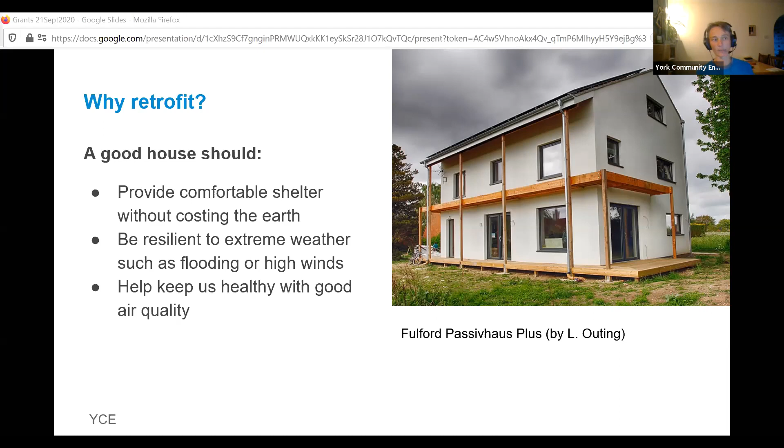Unfortunately, most of us live in houses that have stood for decades, if not centuries, and will be standing in 2050 when the UK is supposed to be carbon neutral. So how we bring them up to the standard needed to both tackle climate change and improve people's well-being is what we will talk about next. So what is retrofitting? It's basically making improvements to an existing structure, in this case a house, and each house leaks heat at different rates from different components.

Now, we could just retrofit by fitting new technologies, such as renewables and energy smart systems, to provide the energy we need. But at YCE, we believe that ideally we should adopt the fabric first approach. So reduce the energy needs, reduce the heat losses and energy losses in the first place. We'll look at the different ways to achieve it shortly, but it's also worth mentioning that the first step of any retrofitting should be making sure that basic repairs and maintenance are done. Fitting lots of insulation to a wall that's getting wet from a leaky gutter could lead to serious problems such as mold. So maintenance comes even first, to make sure that the fabric's good.

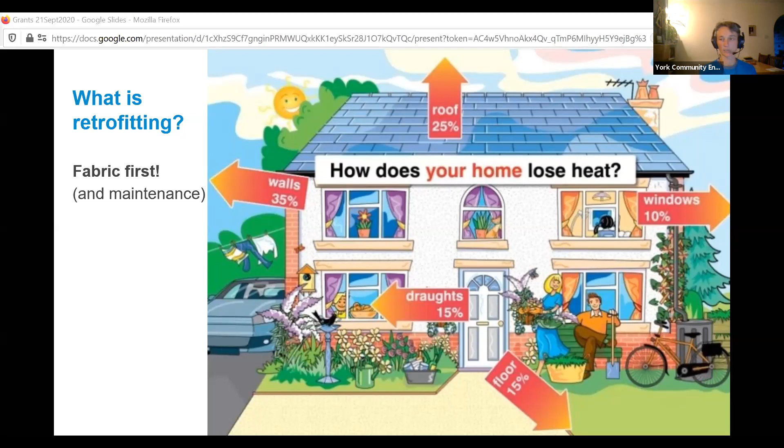So let's look at the first thing that springs to mind when we think about energy efficiency home upgrades. It's probably going to be insulation. If you think of insulation as a winter coat for your home, you choose the one that's suitable for where you are, for the climatic and local conditions. So for example, in relatively dry York, you will be able to consider a wider range of insulation and wall finishes than in rain-swept Scotland.

Without going into too much detail, each house component and insulation material has a U value. Now, this indicates the rate at which heat flows or is wasted through a material. So the lower, the better. And for example, a typical uninsulated suspended timber ground floor has a U value of around 3.3 watts per square meter Kelvin, while a properly insulated one will have a U value of 0.15 or less.

Now, these figures may not sound huge or important, but insulating a floor like that, which we've done during our housewarming party, has improved its U value by around 20 times. And in so doing, has increased the thermal comfort in the room. And I'm sitting on that floor right now.

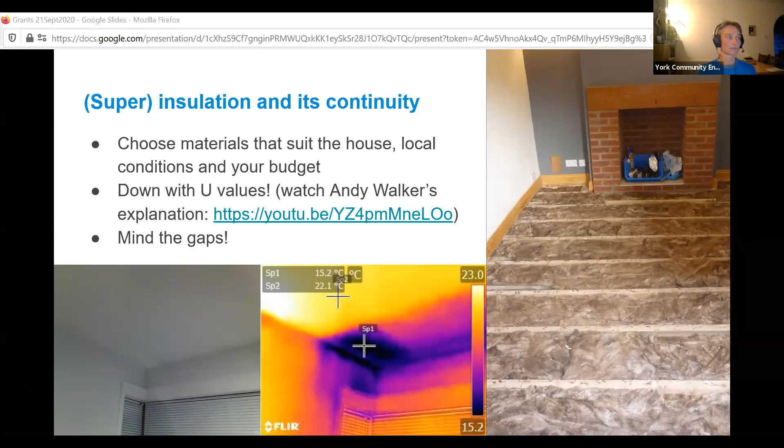Speaking of gaps, airtightness is another hallmark of good retrofitting. It may not sound like a desirable quality for a good home, but it's actually incredibly important. It basically means removing any uncontrollable airflows caused by gaps and cracks in the building fabric. So that's your walls, roof, floors, and other structural parts.

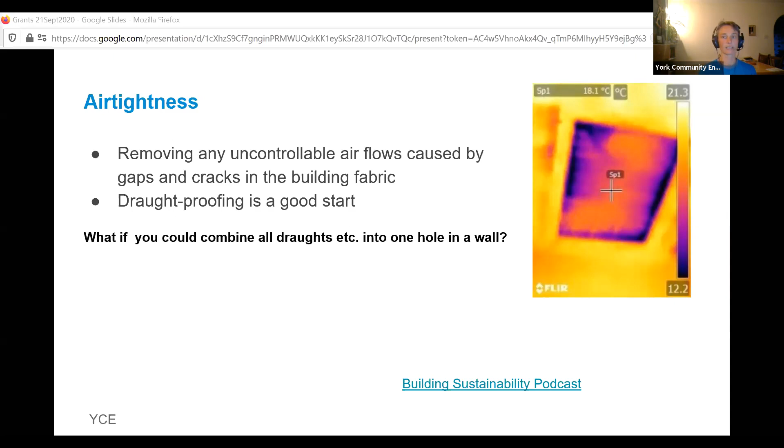Just to help you visualize the scale of the problem, imagine this. Imagine if you could combine all of the drafts and all the gaps and cracks in your house into one hole in a wall. This is something I learned from the Building Sustainability podcast that you will get a link for, and that's worth listening to. So in a house that's built to building regulation standard, that hole, combining all of those gaps and drafts, would be the size of a cash machine.

Now, to me, that sounds like a very big thing to have in a room in your house. And that cash machine in this case is actually working in reverse. You're feeding it money rather than getting money out, because you're paying high energy bills and costing the earth through increased carbon emissions. Or if you can't afford it, you live in a very cold home because you might not be able to afford to waste money like this.

By comparison, in a Passivhaus the hole will be the size of a credit card. And that's just to visualize what sort of scale we are talking about here. I think it's a very powerful way to look at that.

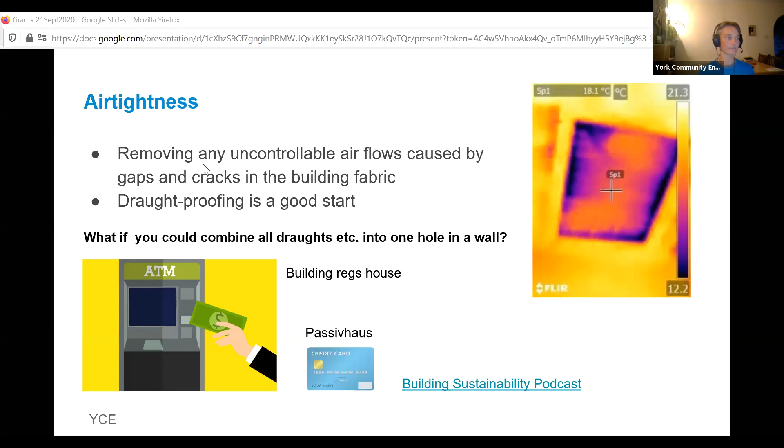But while you're busy removing drafts and wrapping up your house, you do need to think about keeping a healthy indoor air quality with ventilation. We often worry about outdoor air pollution, which is definitely worth worrying about, but we actually spend up to 90% or more of our time indoors. And for our well-being and health, it is crucial to have good fresh air supply. The tricky bit is balancing the benefits of incoming fresh air with keeping your precious heat.

And there are various ways of achieving that with different types of ventilation, starting from the simple opening of windows or trickle vents, to humidity regulated vents, or the advanced mechanical ventilation with heat recovery, where incoming air is warmed by outgoing stale air. Those systems also filter the air, so they are particularly well suited for people with respiratory conditions.

And the picture, which you may be puzzling over, is actually filters from a York Passivhaus, a different one to the one pictured earlier. And you might be able to guess which one is the one that was taken out after a few months of filtering the outside air to bring fresh air into the house.

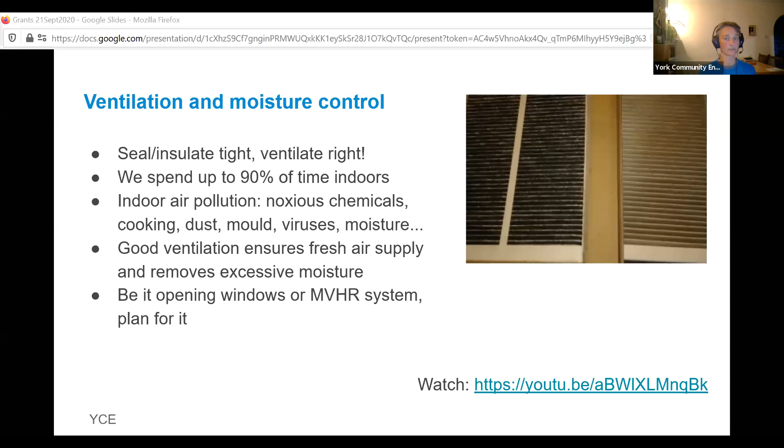To sum it up, each house is unique. We all live and use our houses in different ways. There may be two houses that look the same on the same street, but they will be used differently. There will be different things that people have done to them. So each needs to be approached with a fresh set of eyes.

Doing just one thing, because ventilation and insulation and airtightness all work together or against each other. You need to balance them. So if you do just one thing, it may cause problems elsewhere.

So we would really advise that you have a whole house plan so that you can make sure that what you do now will not make the house worse in the future, or will not make your life worse in the future. If done well, this will benefit you with increased comfort and improved health, and also save on energy bills whilst properly reducing carbon emissions.

But in some cases, if people have been living in very cold houses, if they haven't been able to afford to pay their bills, it may be that their carbon emissions will rise, but at least they will have a decent house at the end of a retrofitting journey, which is what we want to achieve.

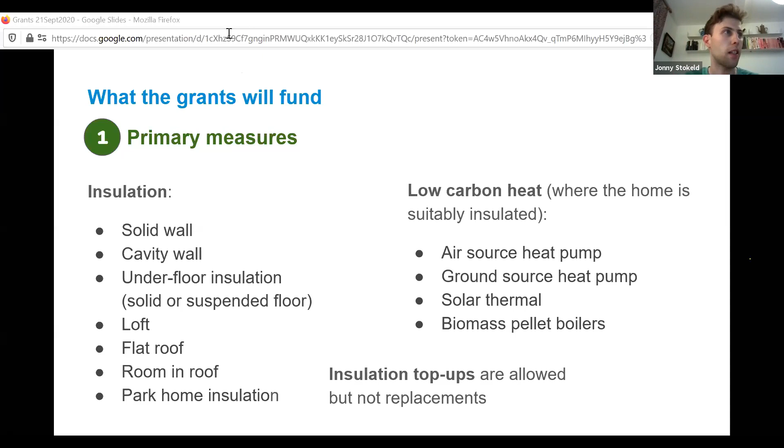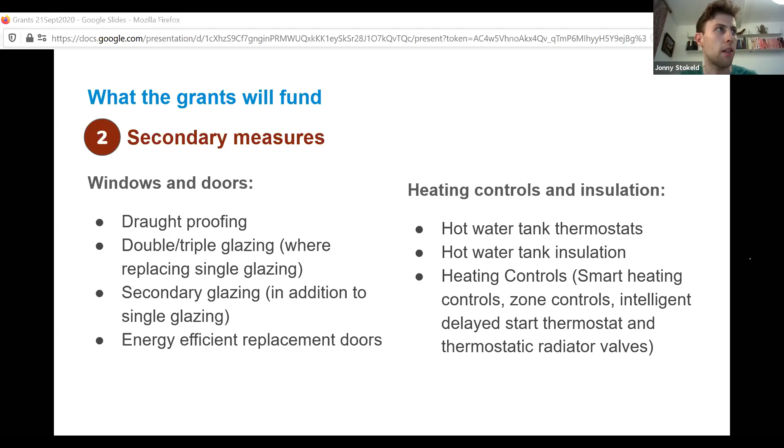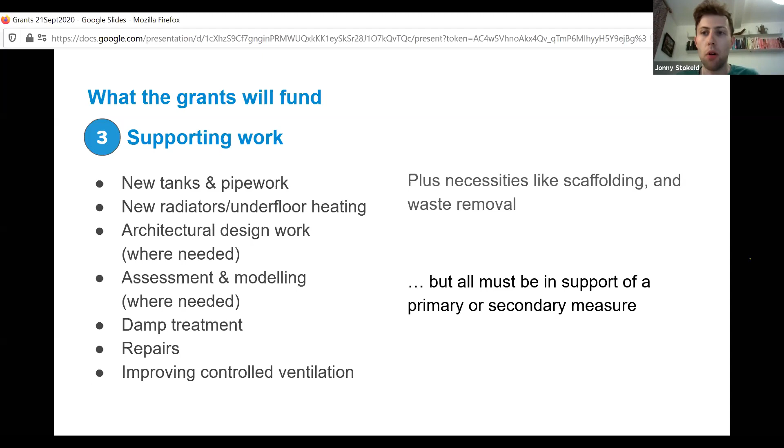Okay, so a bit more information on the next slide about how the money works. So as I said before, assuming that you're not a low income household and you're just applying for the up to £5,000, then the government voucher will provide 2/3 of the quoted cost up to £5,000. So then the homeowner provides the remaining third.

And then if you think about that in terms of primary measures and secondary measures, the value of the voucher that's going towards secondary measures can't exceed the value of the voucher going to primary measures. So if you're spending more on secondary measures than primary measures, you might have to top up the secondary measures yourself. We'll do a worked example if we go to the next slide, which might help make this a bit clearer as well.

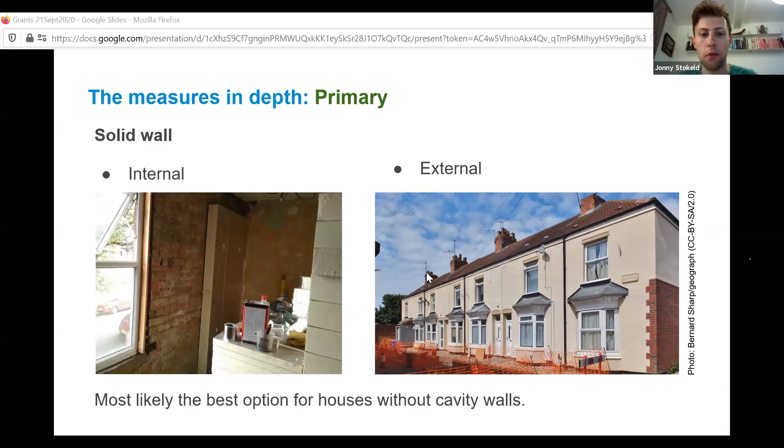And in particular, you need to make sure that there's no water running into the insulation and penetrating into the house. Both can be fiddly, and both have been done badly in the past in previous government funded schemes. But if you get a proper survey and proper modelling and a good contractor, then there's no reason not to go for one of these. So moving on to the next slide.

So cavity wall insulation. This is about filling an existing cavity with something like mineral wool, polystyrene beads, or polyurethane foam to provide insulation. It's relatively quick and not too disruptive. There has been a fair amount of poor work around the UK, but if done right, it again can be very effective. It's not suitable for all locations, certainly in places where you're exposed to a lot of driving wind and rain. There can be risks of damp bridging.

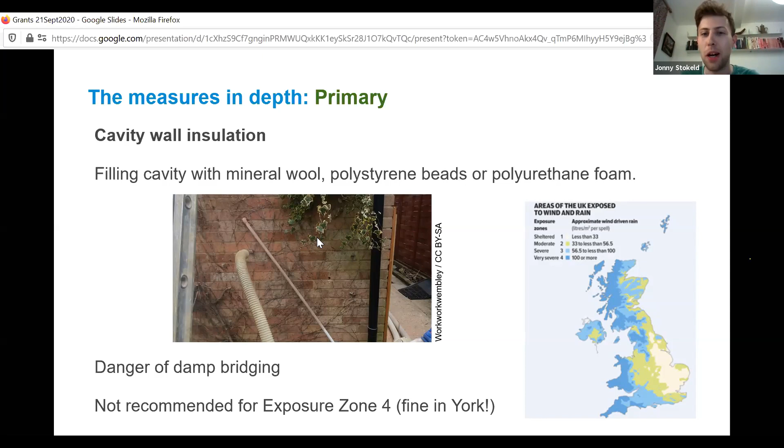So it does need, again, a good survey, and ideally a thermal imaging camera survey afterwards to check that it's all working as expected. York Community Energy has a thermal imaging camera and is very happy to loan it out to people. So bear that in mind if you do go for this. Moving on to the next one.

So underfloor insulation. This can either be under a solid floor or a suspended timber floor. This can be quite messy and disruptive, but has a very high impact on comfort, especially because it's the thing that your feet are in contact with throughout the day. And so a warm floor will make you feel a lot more comfortable than any other warm part of a room.

The grants should easily cover the cost, but it's also quite possible to DIY this. That was what Ivana mentioned earlier about having a housewarming party where you get input from an experienced installer, such as Andy Walker, and a group come round and install it all together over the course of a day or two. And yeah, Ivana's had that done in her house, and I think she's very, very pleased with the results.

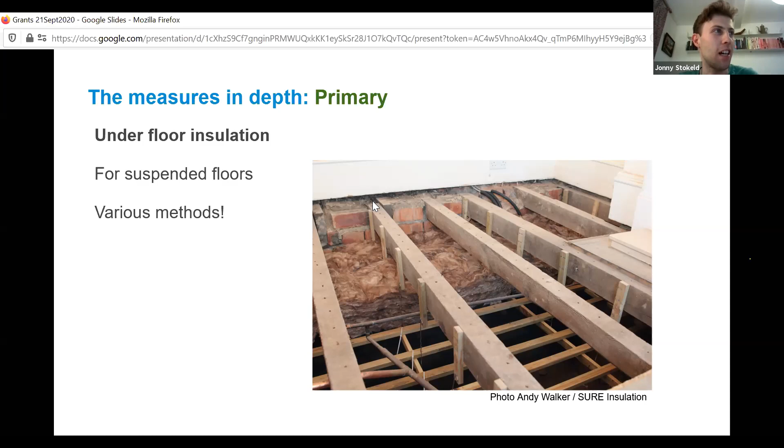Great. Okay, moving on to the next slide. So loft insulation is also eligible. Again, that's top up, but not replacement. So you can have insulation of your loft, or of a room in a roof, or of a flat roof. That can either be warm roof, i.e. insulation on top, or cold roof, i.e. insulation underneath.

Quite a lot of this has been done in the past, but with varying quality. So again, it's important to try and make sure that you've got good quality, and that's the sort of thing that we at York Community Energy are very keen to support. Moving on to the next slide, please.

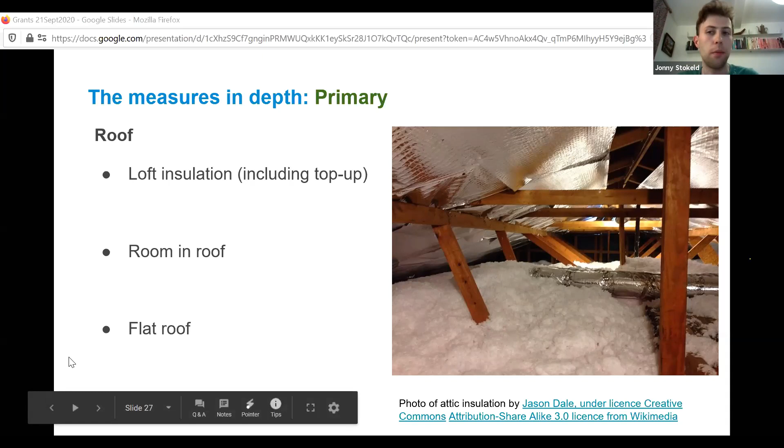So those previous primary measures were all on the insulation efficiency side. So if you're looking to put in a low carbon heating system instead, or as well, even better, then heat pumps are a very good one for this. So air source heat pumps will draw in heat from the air. The way a heat pump works is basically a reverse fridge is how it's often described.

So it's using 1 unit of electricity to pull in another 1 or 2 or 3 units of heat from the surroundings, so that the amount of heat that you're getting into your house is more than the amount of energy that you're using from the grid. So air source heat pumps pull heat in from the air, ground source heat pumps pull it out of the ground, but that means that you need a fair amount of land outside your house to be able to put pipes down.

These are only really practical if your house is well insulated. They put out lower temperature heat than, say, a gas boiler, and that's one of the main reasons that having good insulation is important. And similarly, it might be necessary to have new radiators, like larger radiators, or underfloor heating, so that the heat output is as good, even though the temperature is lower.

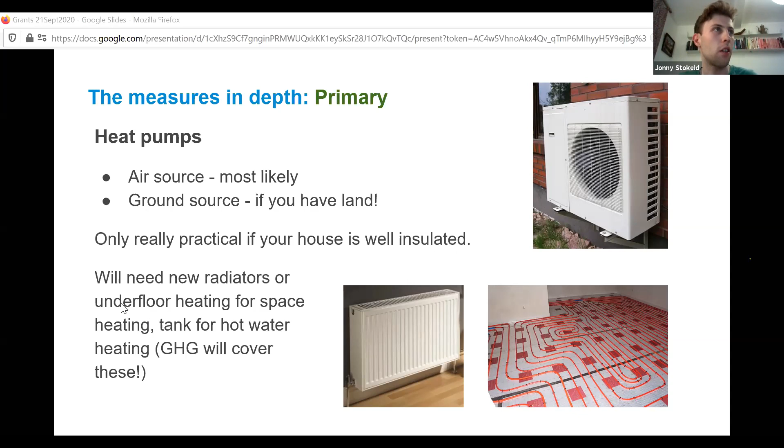So solar thermal. This involves putting vacuum tubes on your roof and transferring heat into a tank. Because solar generally gives you the most energy during the summer, it's not especially useful for space heating, heating up the rooms of your house, because there isn't very much output at that time of year. But it can be useful for meeting some of your hot water. Usually it'll only supply around 40 to 60% of your hot water, so you may need other technologies as well.

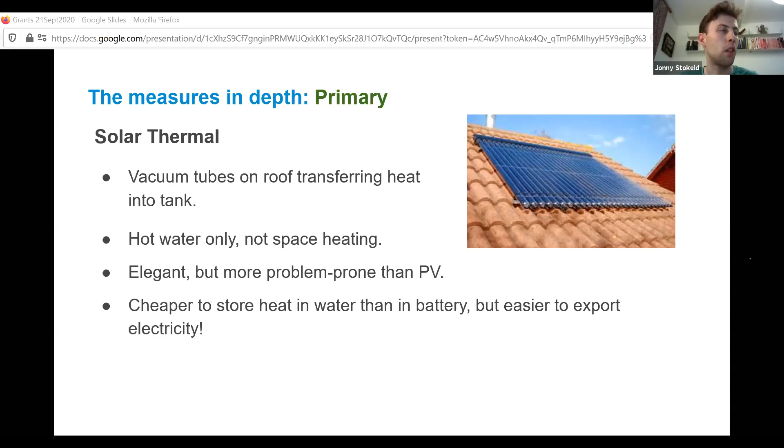It can also be more problem prone than PV, so often solar PV generating electricity will be a better solution, but this is definitely one that's worth considering as well. Moving on to the next slide.

So biomass boilers as well. These can be quite expensive. I guess the main thing about biomass boilers to flag is that their green credentials depend on where the biomass is coming from. It can often be not coming from a sustainable source, in which case it's not actually a very green technology. And certainly if this was to be scaled up to a national level, then producing heat from biomass would be very, very difficult to do in a sustainable way.

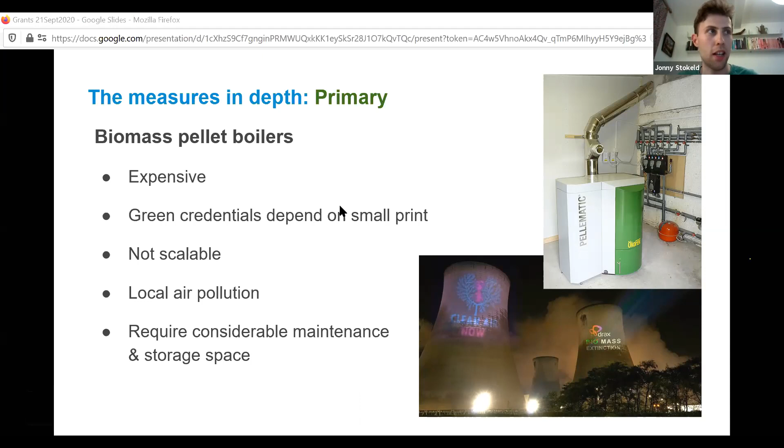But it can be very useful for certain contexts, especially in rural contexts. It can have problems with local air pollution as well, which is again why a rural context can be better. So yeah, one to be a bit more wary about. I think we probably prefer heat pumps at York Community Energy, but this is one that's also eligible for the Green Homes grant as well, and definitely worth considering as part of the process of looking at what measures you might want.

Next slide, please. So just looking at some of the secondary measures now. So firstly, thinking about windows and doors, there's a little diagram on the right here showing the heat loss through single glazing compared to double and triple glazing. So if you do have single glazing, then replacing it with double or triple glazing or putting secondary glazing in can be a very good way of reducing the heat loss quite drastically from the windows.

Draft proofing can be a very good, quite low cost way of improving the comfort and the temperature of your house as well. I know that's something that I've done quite a lot of DIY draft proofing in my own flat, and it's made a massive difference. York Community Energy, I think we'll be running a draft proofing workshop quite soon to teach you how to do that. That was where I learned, and I found that really, really helpful. So that's definitely worth doing.

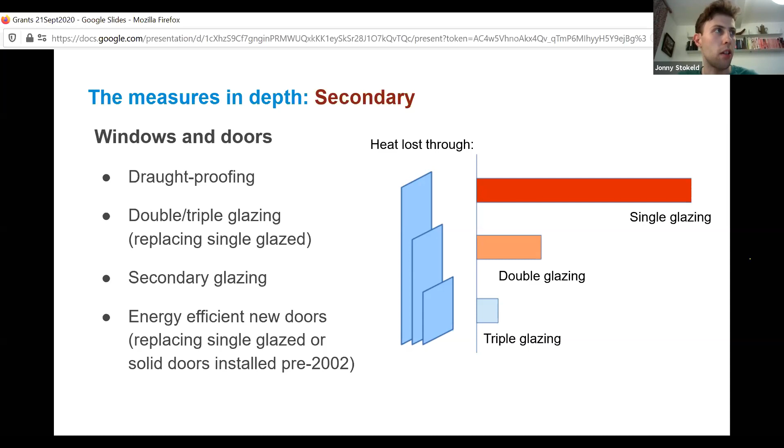However, in the context of doors, it might be better just to put a whole new energy efficient door in place. This will only be eligible for the grant if it's replacing single glazed or solid door installed pre-2002. Next slide, please.

So if you haven't already got insulation on your hot water tank or a thermostat on your hot water tank, then that's definitely a good idea. And another one definitely worth considering is heating controls, so that, for example, you can set the heating in your bedroom to come on later than the heating in your lounge. It allows you to have a lot more control over which parts of the house are warm at different times, and allows you to use energy much more efficiently. There's quite a few different ways of doing that, so definitely worth looking into, and can be a very low cost way of reducing your energy bills quite drastically. Next slide, please.

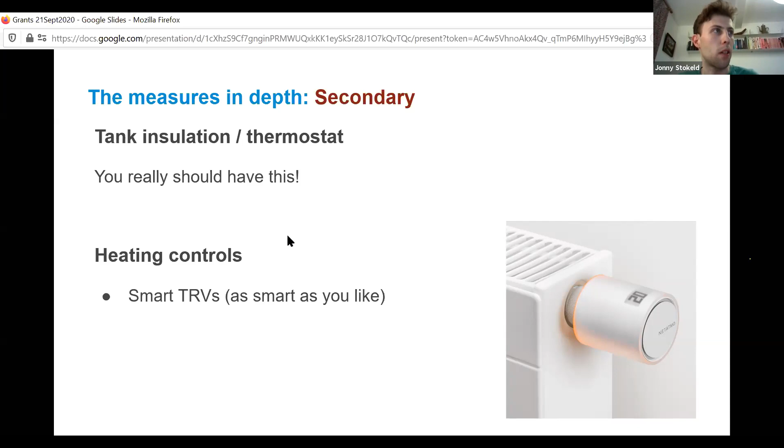Solar PV and storage, while very good things to be installing, aren't covered by the Green Homes Grant, because the Green Homes Grant is looking at the heating side of things. And if you start the work before your voucher has been issued, then that won't be covered by the grant as well. So that's one to definitely make sure that you've got your grant before you commission the work to start. So if we move on to the next slide, I think at this point I'm handing back to Ivana.